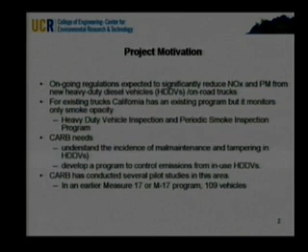Okay, at the time of this project, and I'm not going to tell anybody when it actually started, but it did start back in the EMFAC 2000 era. So these plots here are from EMFAC 2000, and they just kind of show what we would want to target, and it's pretty obvious. It's basically the Class 8 type of vehicles that we're going to be looking at in terms of the NOx emissions.

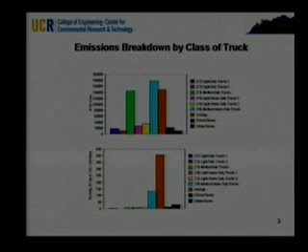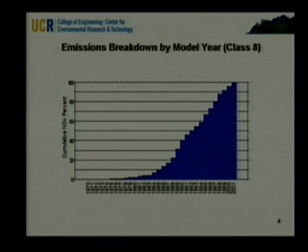Okay, this is again an old school breakdown here of emissions by model year, and what you can see here is that if you look at the break in the emissions, about 80% of those emissions were from the year 1988 and beyond. So we were trying to target that particular area, although the study sort of hit a pretty broad range of vehicle categories.

So the project itself, we're going to look at two somewhat separate elements, both geared at understanding in-use emissions and maintenance and issues that can affect in-use emissions.

The first segment is essentially to review data records and get an idea of how the tampering rates from a variety of different sources would compare to those that are currently in EMFAC or that are currently being used by ARB at the time.

The second segment of the program was essentially an in-use testing program where we grabbed a couple of vehicles off the road and from rental car agencies, took them on a course, and we looked at what their emission rates were over varying types of operation.

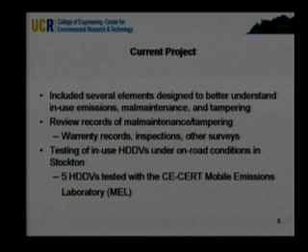Okay, so the first part of the program was in fact the kind of paper study part of the program. We looked at a number of different sources to try to better understand tampering and malmaintenance records.

Part of it was a literature review. We looked at some of the visual inspections that ARB was doing in their surveillance programs. We looked at warranty records, independent shop records, and we did also some separate studies of ourselves where we were essentially looking at roadside surveys at truck stops.

Okay, the first part of the program we focused mostly on the literature, and essentially from the literature we identified two studies. One was Radian and one was from Engine, Fuel, and Emissions Engineering, I believe Chris Weaver's group, for those of you familiar with that. From the slide you can see there's a relatively reasonable comparison between these two studies, and these studies were part of the basis for the EMFAC rates in these different target areas.

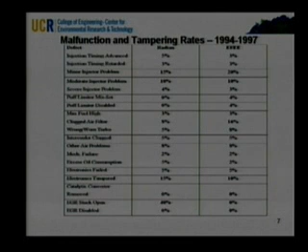So while we did identify these two studies that were already being used in EMFAC, there was not a lot of other data out there that we found that could be put into the queue in terms of this type of information. We did also look at some website information, and that would give us a hint as to what might be a malfunctioning component, but in terms of the actual rates there was not a lot there.

This next slide just shows you where EMFAC was at that time compared to what the revised emission rates were. You can see a lot of the categories line up fairly similar with those two studies from the literature review, although there are some slight differences both from the literature review as well as in moving from EMFAC 2002 to EMFAC 2007.

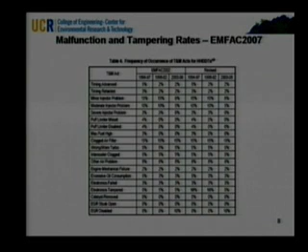Okay, one of the first sources we looked at separate from the literature review was the heavy-duty vehicle inspection program that ARB carries out. There was a subset of about 5,200 records available for us to look at from this particular program. The records themselves span the calendar years 1998 to 2002.

In terms of looking at the calendar years, just below you can see we had a number of records in each of those calendar years. Now that doesn't represent the model year of the vehicles being looked at. That's simply the number of records collected in any particular calendar year under this particular program.

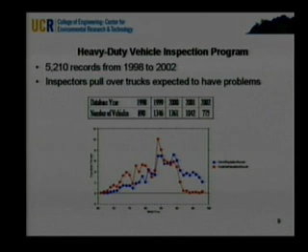So the one aspect about this particular program that's important to point out is the fact that the inspectors' goal is to pull over vehicles that might be suspect. So it certainly is a biased data set in terms of what we might be getting out in terms of the rates itself. At the bottom of this slide it shows the model year distribution of these vehicles, and you can see compared to the 1998 database, it's certainly biased toward the older model years. So we just have to keep that in mind when we look at this data.

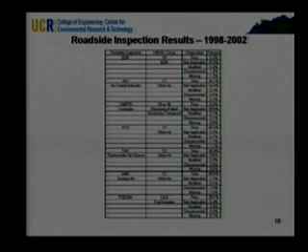Okay, the second set of data is essentially from warranty claims for the different engine manufacturers. The warranty claims come about at a point where there's greater than an incidence of 1%, or for certain model years it could be 25 engines in a particular family, depending on what the population is for that. This comparison basically shows the results of this breakdown compared to the EFEE study that was done, which is kind of used as the basis for EMFAC. You can see in a number of cases there's fairly low incident rates in terms of the values that we got.

On the other hand, there's a couple that really stick out as having high incident rates compared to those found in the earlier study. There's a couple of potential reasons for this. The database, from what I understand—this was done prior to me—there's a possibility you can double count incidents, for example if a truck comes in multiple times. So there are probably some issues that drive this rate up a little higher than expected, and these data are also normalized to DMV registration rates rather than sales records for particular years.

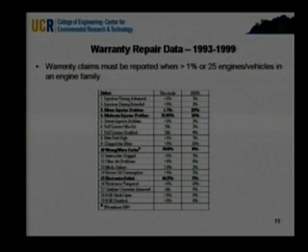The second source we're looking at, and again it probably has a bit of a bias, is basically a repair facility. All of this data was collected from a single repair facility—about 500 records collected over a period of about 1 month. Essentially all the vehicles that went through this repair shop during that month were logged and identified as to what problems they might have had.

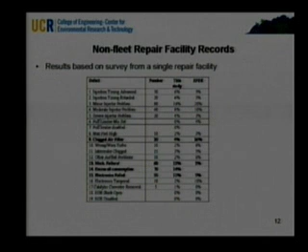Some of those vehicles would have come in for routine maintenance, while others would obviously be coming in for a specific problem, and you'd probably see a higher rate because of that. In comparison with the earlier study, interestingly, even though you might expect higher incidence rates for this repair facility, we didn't actually see that in many categories. A few at the bottom, like mechanical failures and oil consumption, stood out, but overall it was fairly comparable. So perhaps that might even suggest the earlier rates were a little too high, given that this wasn't a fully random sample.

The third portion of the study involved picking out drivers from a truck stop—I think the facility down in Temecula—and essentially pulling them over to do a roadside survey. This would essentially be a random study, and we asked them a variety of questions. For this particular graph, the main point was how many incidents they experienced in these categories over the past 12 months.

The results of this study are fairly comparable to those from the earlier study, especially considering we've got 58 records, so it's a relatively small sample size. In some cases, the rates were maybe a little bit lower.

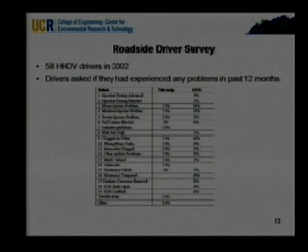In conjunction with this roadside pullover study at the Temecula stop, we also did some ECM downloads for a subset of the vehicles—7 vehicles for this screening study. All of these were Caterpillars, since that was the manufacturer we had software for. The idea was to read the ECM and see if anything had been installed, or if the engine was operating in a non-standard manner outside the factory settings. Of the 7 vehicles, 6 hadn't been changed at all, and 1 had been changed, but only back to a factory setting.

So there were no suspect problems found there—they were all operating within factory settings. In addition to the inspection part of this program, we were also able to download other information, including speed distribution. The chart at the bottom shows the speed distribution for one of the 7 vehicles tested, broken down in miles per hour. More interesting than anything else is that this resource is available, giving you an idea of the activity of heavy-duty vehicles as they travel on the road.

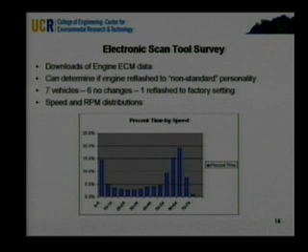Okay, so some of the conclusions from this initial portion of the study. In total, over all of the different records that we looked at, it was about 7,000 records.

The warranty repair incidences were comparable to what we found in EMFAC, with the exception of a couple of different categories. And again, those categories may have been high for reasons that we just didn't have a great enough control of the data set at the time.

The visual inspections did show some signs of tampering, but it wasn't really a very high level, less than 1% for a lot of the different categories.

Now, I guess one could also make an argument that if some of these data sets are a little bit biased on the high end, maybe that EMFAC is a little bit high, but I'm not sure exactly how they implemented this data into EMFAC.

So at the conclusion of the study, there was the conclusion that they reached in terms of doing more work or doing less work in this area. The decision was made that in terms of improving the EMFAC tampering rates, probably there was not a lot of additional information that could be had, at least from these type of techniques, that would be of significant value.

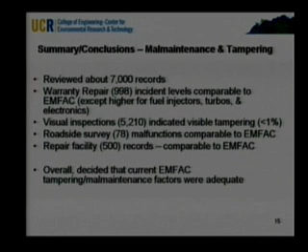Okay, the second part of the program is the in-use emissions testing. This testing was done up in Stockton, California, on a fleet of 5 different Class 8 heavy-duty vehicles. They varied from 96 to 2004 with the different engine manufacturers.

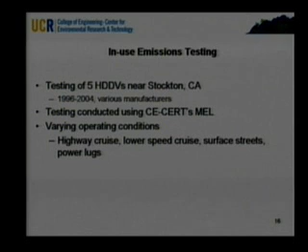The testing itself was conducted with the CE-CERT mobile emissions laboratory, which I'm going to show you in another couple slides. And the testing itself was done not on a chassis dynamometer. It was actually done on the road over a road course that characterized a variety of different operating conditions, including highway cruise, low-speed cruise, surface streets, and other things called power lugs.

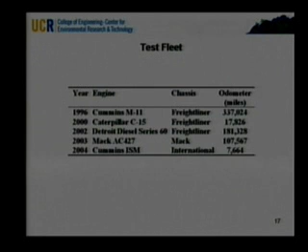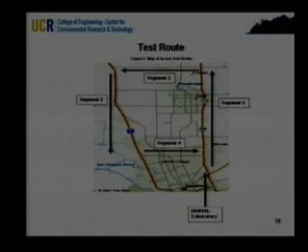It's got a flow rate that goes up to about 4,000 CFM, and essentially we've gone through a 1065 audit with this facility, and we've also cross-correlated this facility with ARB's laboratories down in El Monte, as well as Southwest Research, and we found some pretty good correlation. We've also done some correlation with the Stockton facility with this apparatus, but it's fairly versatile. We can use it with engine testing. We can use it with on-road testing, and we do a lot of testing with backup generators too with this.

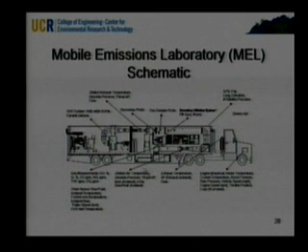They were designed to be an event that potentially could be utilized at the Stockton facility for a maintenance type of program. So essentially, the power lug was done by taking the vehicle to its highest speed and then applying the brake to provide some form of loading on it. So again, it's somewhat of an artificial cycle.

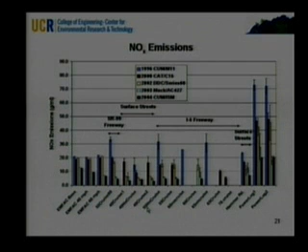We still generally see this trend where the older vehicles have the higher emission rates, and also you can see that for the highway cycles, the older truck here did have a higher emission rate even when you take into account its fuel use.

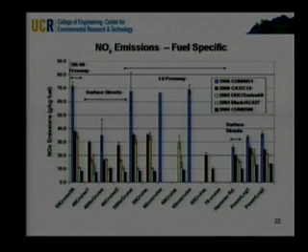Looking at the highway cruise right here, we saw a somewhat interesting trend in that the two later model year vehicles actually had higher emission rates than the three earlier model truck years. So a little bit of a surprise there.

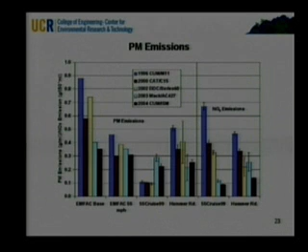For the surface street conditions on Hammer Road, we found essentially similar results as we did for the grams per mile, just a little bit closer in terms of the comparison between the newer and the older vehicles. Not quite as big a difference.

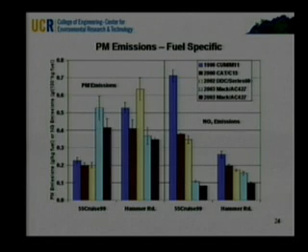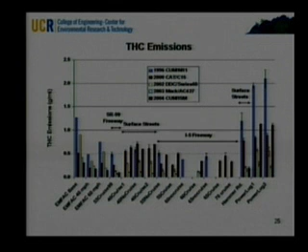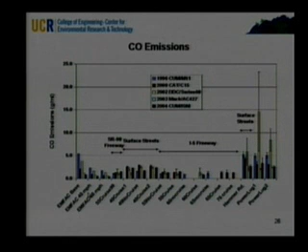The power lugs, again, are a little bit unrealistic, so we're seeing some higher emission rates there. And in general, the emission rates followed this trend where we're seeing higher emissions at the lower speeds and decreasing emissions at the higher speeds. So they tended to follow the trend that was seen in EMFAC, and roughly the comparison between what was seen in EMFAC and what was seen on road was fairly reasonable.

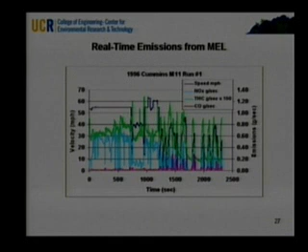Okay, and finally, just conclusions for this part of the presentation. If we look overall at the data, there's a lot of differences depending on what type of driving conditions the vehicles were under, what specifically the pollutant was, and also what vehicle we were testing at the time. The real-time emissions, as you might expect, were transient and pretty dependent on the engine operation.

For the NOx emissions, we saw a general trend that the older vehicles had higher emission rates as opposed to the new vehicles, and we also found that for some of the vehicles there were higher NOx emissions under the freeway speeds, but that wasn't the case for all of the vehicles.

Okay, for PM, the surface street driving and the highway driving, we saw some different trends. For the highway driving, we found that the newest vehicles actually had the highest emission rates for particulates, and part of that we could attribute to a NOx PM trade-off. For the surface street driving, the older vehicles had the higher emission rates, and those emission rates for the older vehicles were also a lot higher for the surface streets compared to them driving on the highway.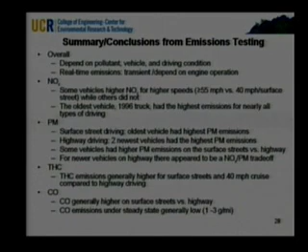Are those the email questions? A couple questions for Tom. Two questions. One is from Tom Darlington, who's always anxious to second guess our work. And the other is from Lee Zhu, who works in our offices. Okay. Actually, I talked to Tom earlier this week, so.

Okay, the first question is from Tom Darlington. Do you consider the warranty data to be a random sample of the fleet? If not, what bias do you think the warranty data has in terms of determining the frequency of tampering and malmaintenance? In terms of the data set for the warranty, from what I understand, the incidence rates from the warranty were divided by the registration rates from the DMV database. So one bias I would think is that you might want to take the warranty data and divide it instead by the sales figures, although there's probably some complications in going from California versus other areas of the country. So that's one potential issue that I would see in the database for the warranty data.